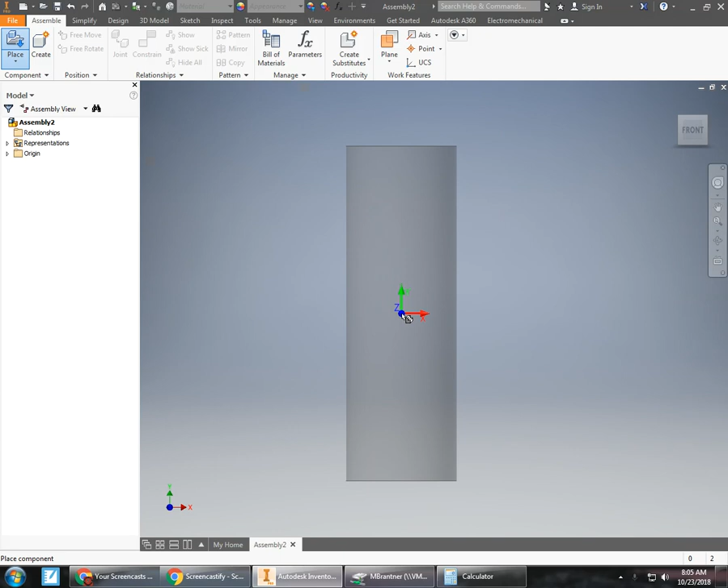If I wanted to place a second one, I could click on it there and it would make another peg. I can then click the escape key, and I have two pegs. You see it says round peg 1, round peg 2. I actually only need one round peg, so I'm going to right click on here and delete that peg. So I've got one round peg.

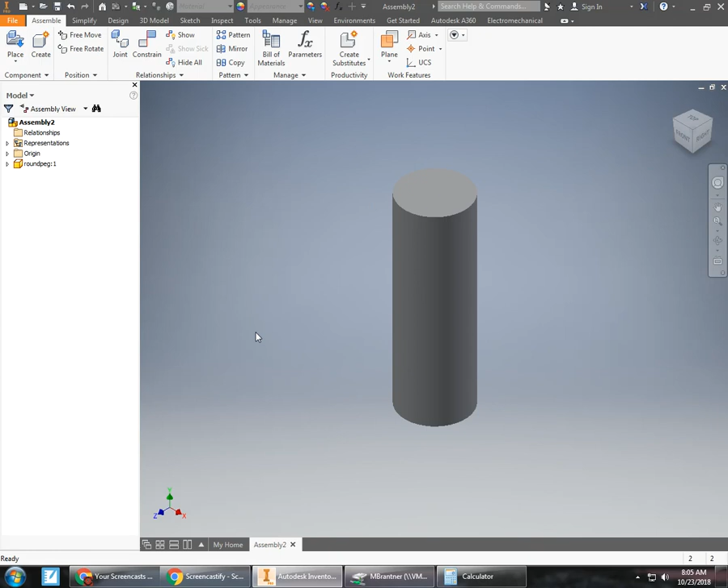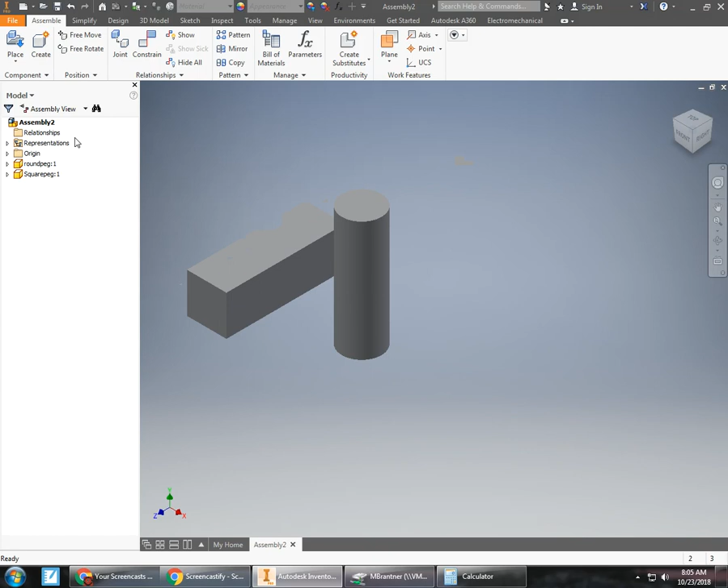Now I need my square peg. I'm going to place it from my files that I saved. Make sure you save on your drive and not on the computer itself, because if that computer doesn't work, you at least have your files and you aren't stuck with the files on a computer that doesn't work.

Lastly, I am going to place my pegboard. Let's see here, where are we? The pegboard, okay. And then I'm going to either right click and click OK or click escape in order to place that. Now I have my three parts: my pegboard, my round peg, and my square peg. So that's the first one on page 3.

Now we're going to ground this pegboard. By grounding it, we mean we can't move it around. It's going to stay in place and everything else can move and connect to it. So I'm going to come up here on my pegboard, right click, and it opens a huge long list of things to do. I'm going to scroll down till I find grounded. Now my pegboard is grounded, and I can see by the little pin in it that it's grounded. Also, it tends to be blue when it's grounded.

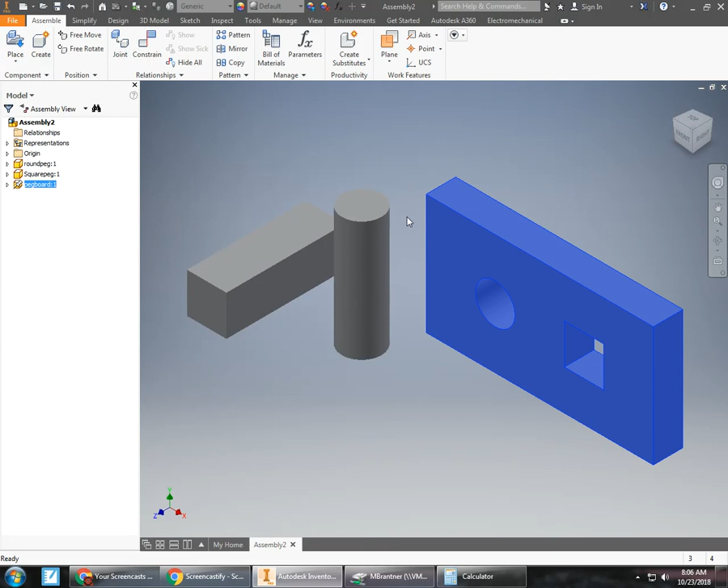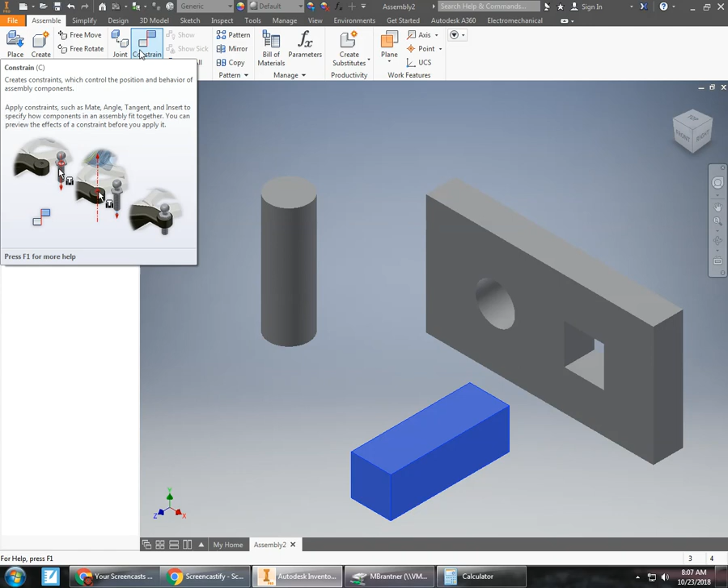Now we need to be able to put this square peg in here so that it moves only up and down through that hole. Same thing with the round peg. They're not quite there yet, so we're going to do that. In order to do that, we use what's called a constraint, and we can use this button right here that says constraint. It controls the positions and gives us a nice dialog box that says place constraint.

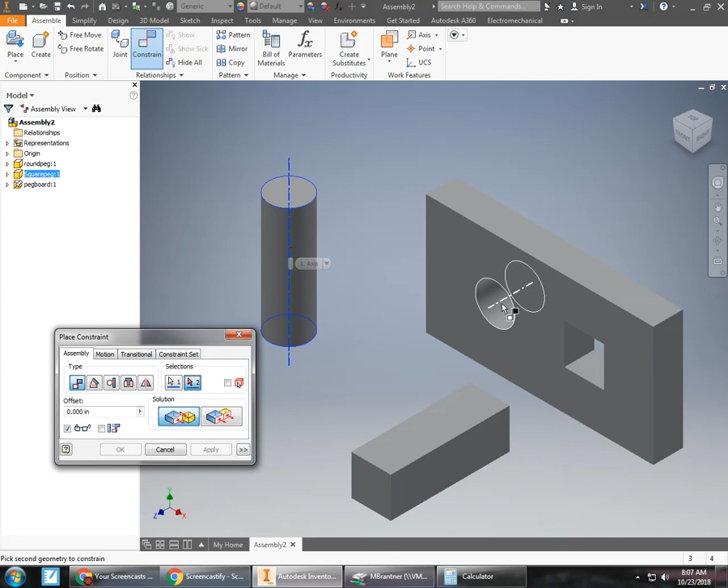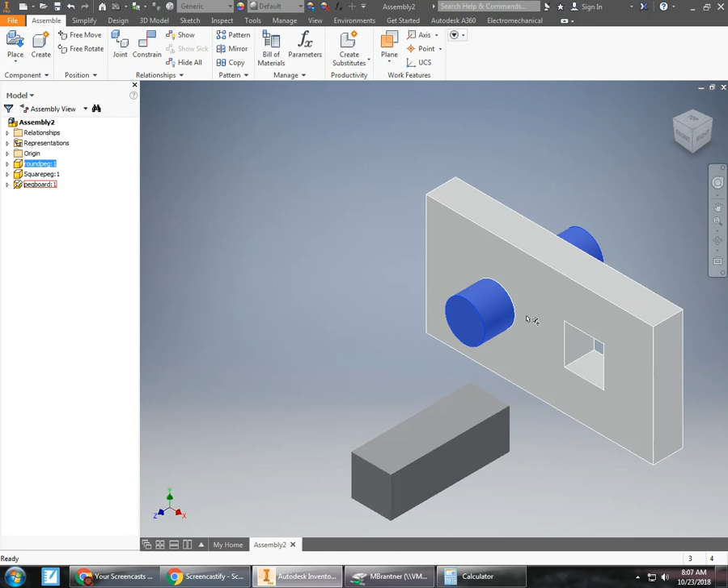Now our round peg's pretty easy. We can select different faces. It looks like we can select this flat space here, or we can select its axis. We're going to select its axis, and then select the axis of the hole. We click, and you hear that popping sound, which means this round peg is constrained to the axis of the hole. I'm going to click Apply, and then click Cancel. Now I cannot move this peg anywhere but in and out of the pegboard where it's supposed to be. So that's in good shape.

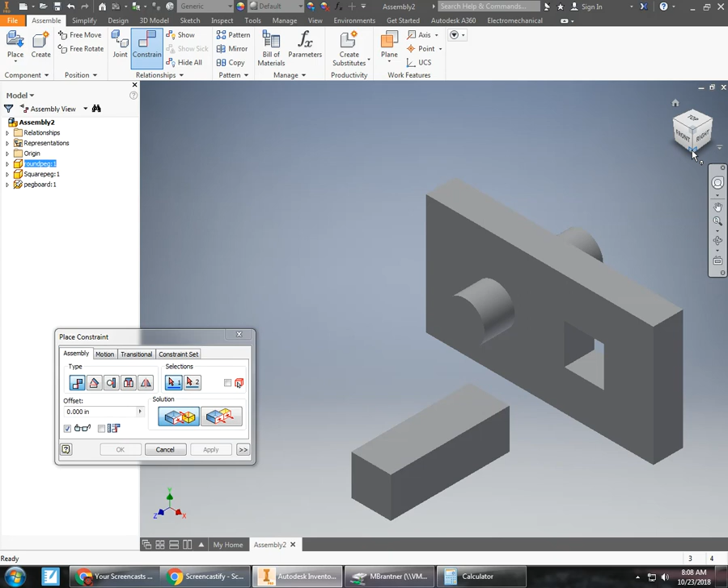Now we're going to constrain the square peg. I'm going to click Constrain again. The square peg's a little more difficult because you have to move the view cube around so we can see the different faces where we're going to constrain it. I'm going to constrain this face of the peg to this part of the hole right here. First I click on that part of the hole, use my view cube, and click on that. Now it's constrained here. I apply. Now I can still move it around, but it's only constrained to one spot.

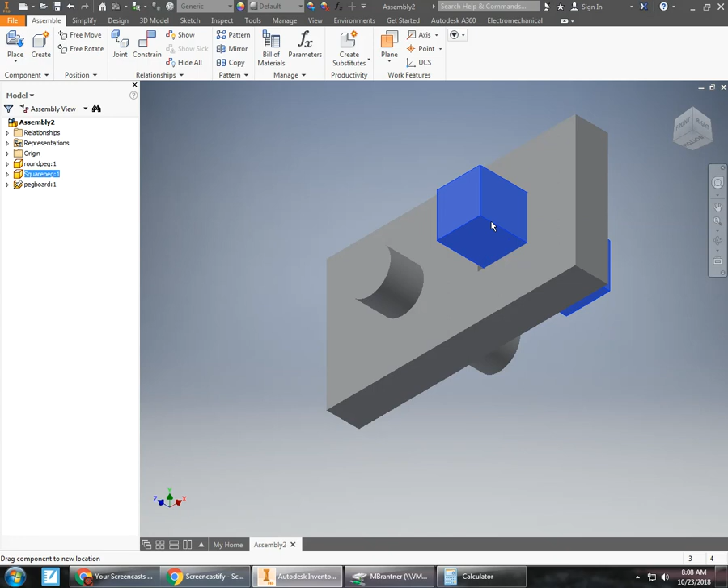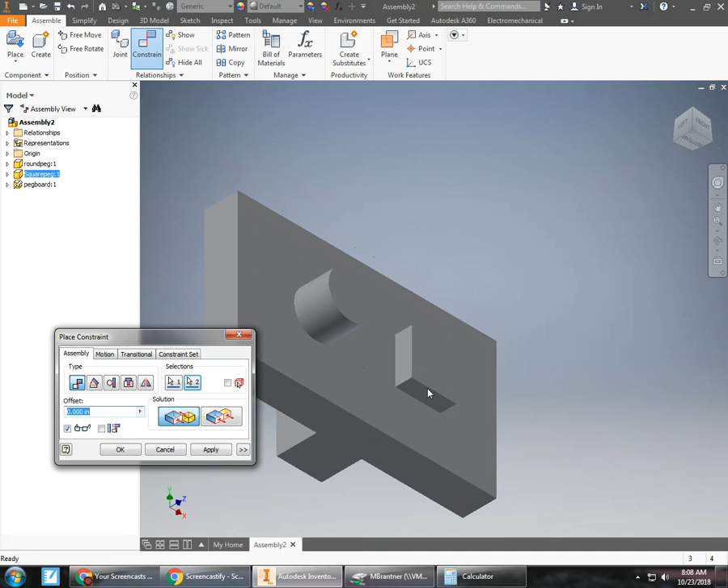Now we need to constrain another face of it so that it'll only go in and out of the hole. So I'm going to constrain this side. I hit Constrain, constrain that part, and flip my view cube around so I can see. Now I can't because it's blocked, so let's see if I can get another angle. There we go, get that face. Now I click OK. Now my peg is constrained so it can only go in and out of that hole. So now you've got your constraints. You can still move the pegs up and down in your pegboard, but they are constrained to those holes. They cannot move from those holes.

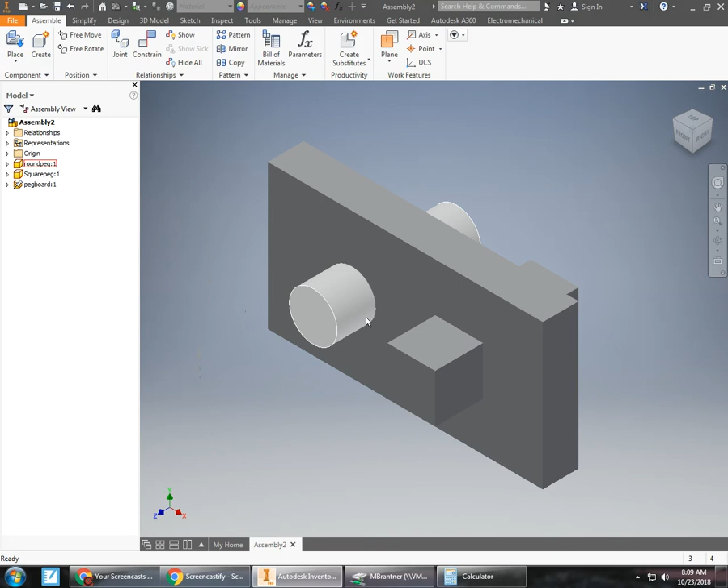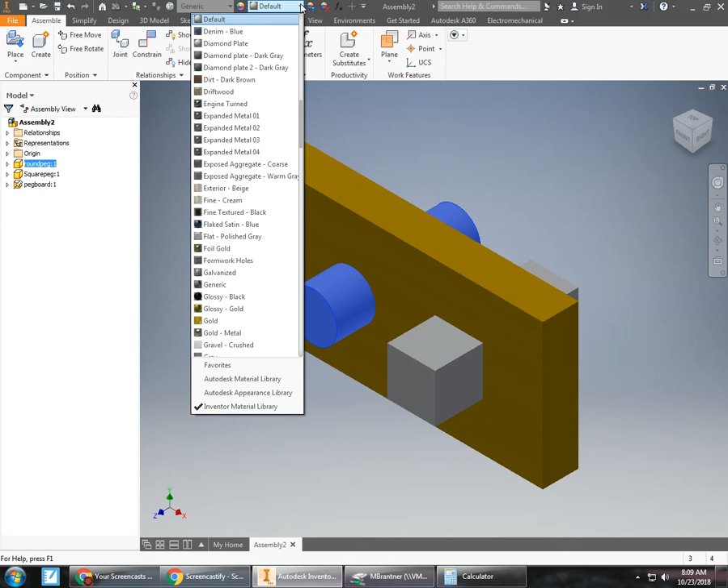Now, another good thing to do would be to change some colors on these. I'm going to select my part and go to default appearance. Let's see, I want to make that gold. If I click on that, it should make it a gold color, up in the appearance bar up here. Now if I change my peg, what color do I want my peg to be? I think I want my peg to be orange red. Click, that does that.

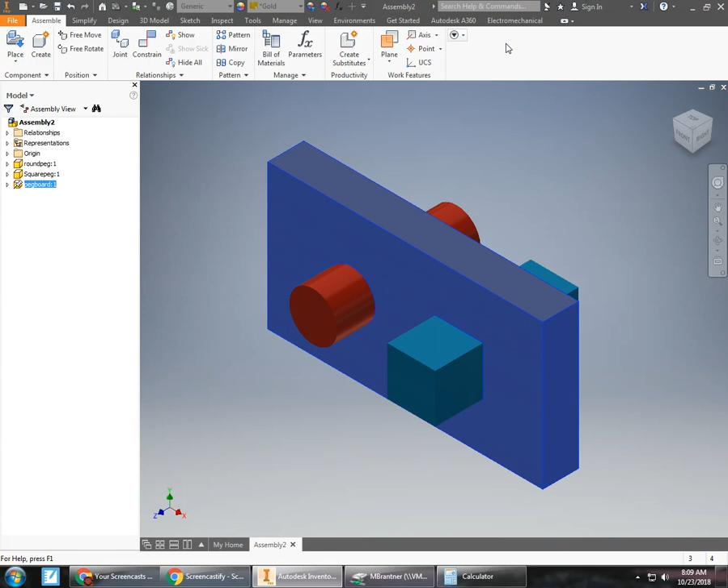And I want my square peg to be—what did I make it there? Missed on that one. I'm going to make it a sky blue. Okay, so now I have all of my different colors. Now I can see what's going on, but I also need to save it. So I'm going to go to File, Save As, and it's going to say Autodesk Assembly. I'm going to name it Pegboard Toy Assembly. Now you've finished all of page 3.